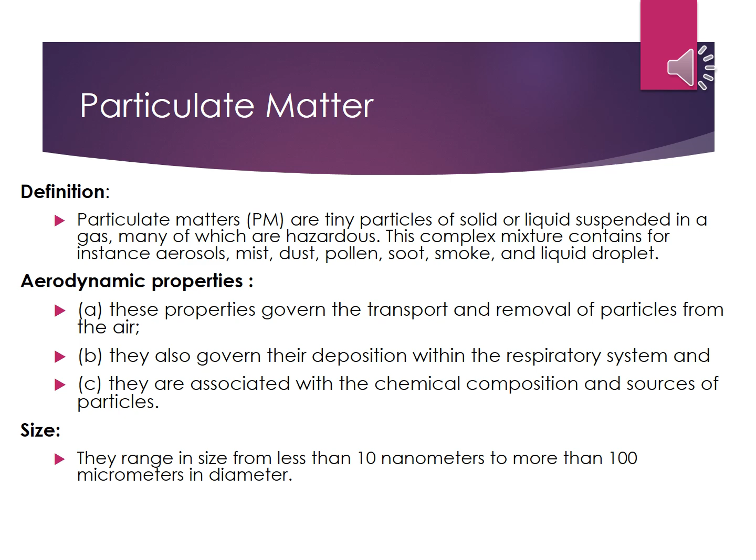Coming towards the sources of particulate matter. The sources are divided into two major types, the primary and the secondary sources. Primary sources are derived from both human and natural activities. Natural sources of particulate matter include sea salt, dust such as airborne soil, and pollen, but it also includes material from volcanic eruptions and particles formed from natural gaseous precursors, for example sulfates.

A significant portion of particulate matter is generated from a variety of human activities. These types of activities include agricultural operations, industrial processes, combustion of wood and fossil fuels, construction and demolition activities, and entrainment of road dust into the air.

Secondary particulate matter sources emit air contaminants into the atmosphere and form or help form particulate matter. Hence, these pollutants are considered precursors to particulate matter formation. These secondary pollutants include SOx, NOx, VOCs, and ammonia. Control measures that reduce particulate matter precursor emissions tend to have a beneficial impact on ambient particulate matter levels.

Some important industrial sources of particulate matter emissions are iron and steel mills, the blast furnaces, steelmaking furnaces, petroleum refineries, the catalyst regenerators, air-blown asphalt, and sludge burners, cement industry, asphalt batching plants, production of sulfuric acid, production of phosphoric acid, soap and synthetic detergent manufacturing, glass and glass fiber industry, and instant coffee plants. There are many more examples.

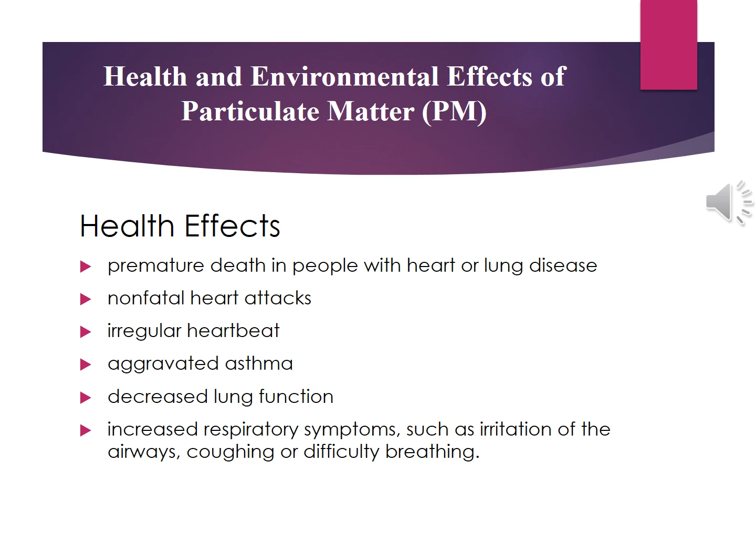Coming towards some of the environmental effects. Fine particles like PM2.5 are the main cause of reduced visibility, which we often call haze. Particles can be carried over long distances by wind and then settle on ground or water.

Depending on their chemical composition, the effects of this settling may include making lakes and streams acidic, changing the nutrient balance in coastal waters and large river basins, depleting the nutrients in soil, damaging sensitive forests and farm crops, affecting the diversity of ecosystems, and contributing to acid rain effects. Particulate matter can stain and damage stone and other materials, including culturally important objects such as statues and monuments. Some of these effects are related to acid rain effects on materials.

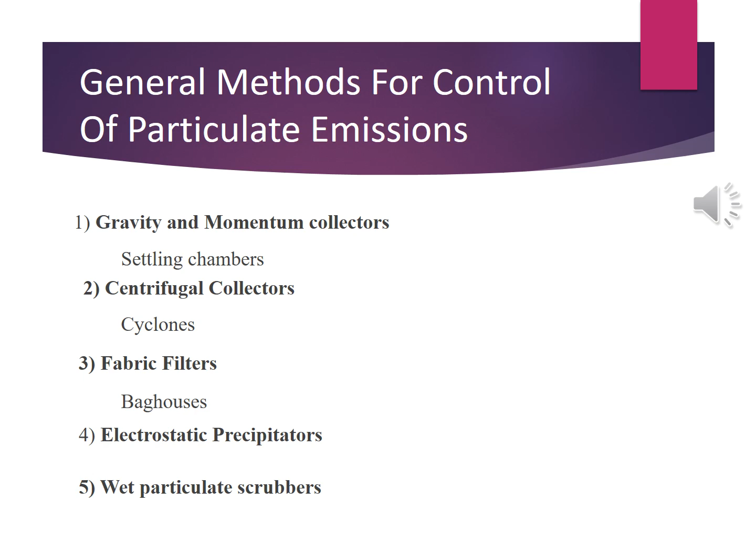Now let's talk about some general methods and technologies for the control of particulate matter emission. There are 5 types which are worth mentioning here. Number 1, gravity and momentum collectors. Number 2, centrifugal collectors. Number 3, fabric filters. Number 4, electrostatic precipitators. And number 5, wet particulate scrubbers.

Let's first talk about gravity settling chambers. This is a simple particulate collection device using the principle of gravity to settle the particulate matter in a gas stream passing through its long chamber. The primary requirement of such a device would be a chamber in which the carrier gas velocity is reduced so as to allow the particulate matter to settle out of the moving gas stream under the action of gravity. This particulate matter is then collected at the bottom of the chamber. The chamber is cleaned manually to dispose the waste.

The gas velocities in the settling chamber must be sufficiently low for the particles to settle due to gravitational force. Literature indicates that gas velocity less than about 3 meters per second is needed to prevent re-entrainment of the settled particles. The gas velocity of less than 0.3 meters per second will produce good results. Curtains, rods, baffles, and wire mesh screens may be suspended in the chamber to minimize turbulence and to ensure uniform flow. The pressure drop through the chamber is usually low and is due to the entrance and exit losses.

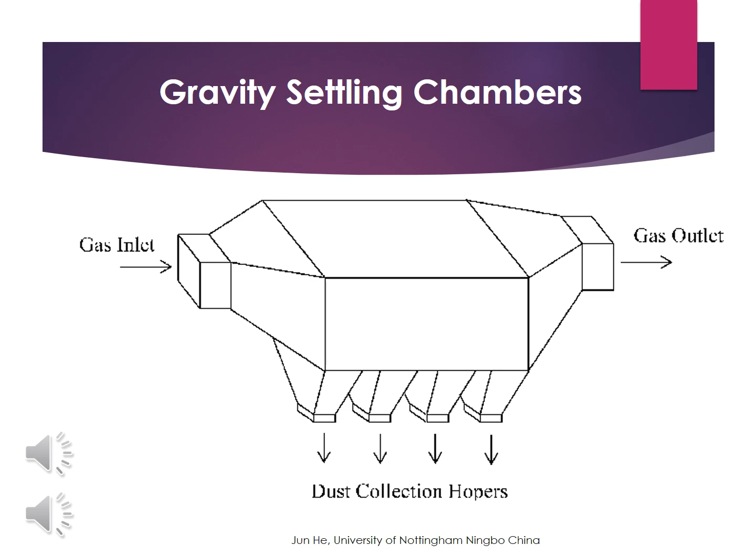Some advantages of gravity settling chambers: low initial cost, simple construction, low maintenance cost, low pressure drop, dry and continuous disposal of solid particles, use of any material for construction, and temperature and pressure limitations will only depend on the nature of the construction material.

Some disadvantages of the gravity settling chambers would be large space requirements, and only comparatively large particles greater than 10 micron can be collected. Because of the above mentioned advantages and disadvantages, settling chambers are mostly used as pre-cleaners. Use of settling chambers as pre-cleaners can also reduce the maintenance cost of high efficiency control equipment, which is more subject to abrasive deterioration.

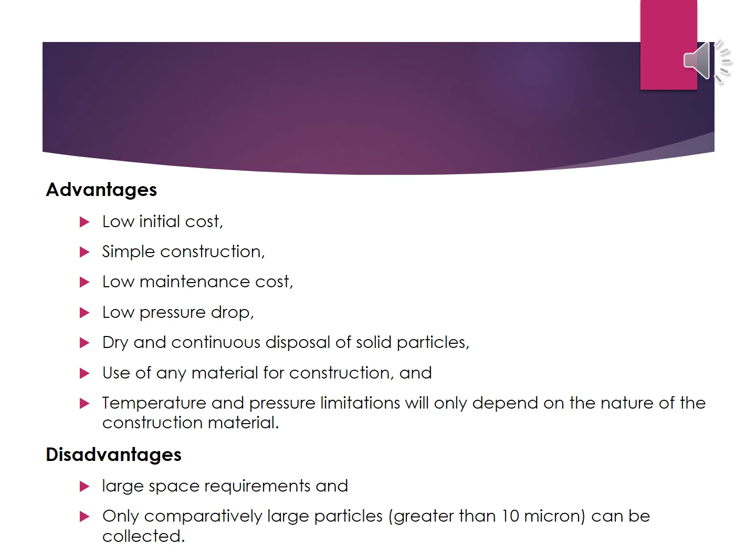Now let's talk about cyclone. Cyclone is an example of centrifugal collectors. Cyclone separators, or simply cyclones, are separation devices that use centrifugal forces for removing the fine particles. They are also known as centrifugal or inertial separators. They prevent more fine filtration methods from having to deal with large, more abrasive particles later on.

Also, several cyclone separators can operate in a parallel series, and when such an arrangement is set up, then the system is known as multiple cyclone. It is important to note that cyclones can vary drastically in their size. The size of the cyclone depends largely on how much flue gas must be filtered, and thus larger operations tend to need larger cyclones.

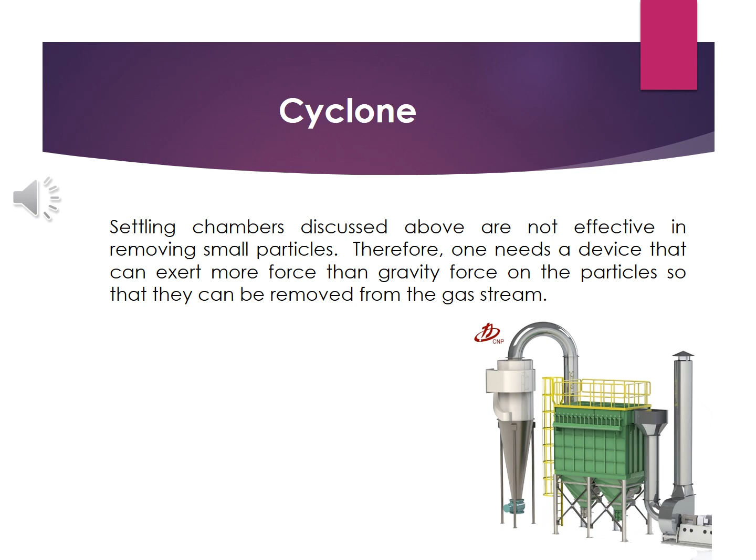Cyclone separators work much like a centrifuge, but with a continuous feed of dirty air. In a cyclone separator, dirty flue gas is fed into a chamber. Inside this chamber exists a spiral vortex similar to a tornado. The lighter components of this gas have less inertia, so it is easier for them to be influenced by the vortex and travel up it. Unlike these particles, larger components of particulate matter have more inertia and are not as easily influenced by the vortex.

Because these large particles have difficulty following the high-speed spiral motion of the gas and the vortex, the particles hit the inside walls of the container and drop down into a collection hopper. These chambers are shaped like an upside-down cone to promote the collection of these particles at the bottom of the container. The cleaned flue gas escapes out the top of the chamber.

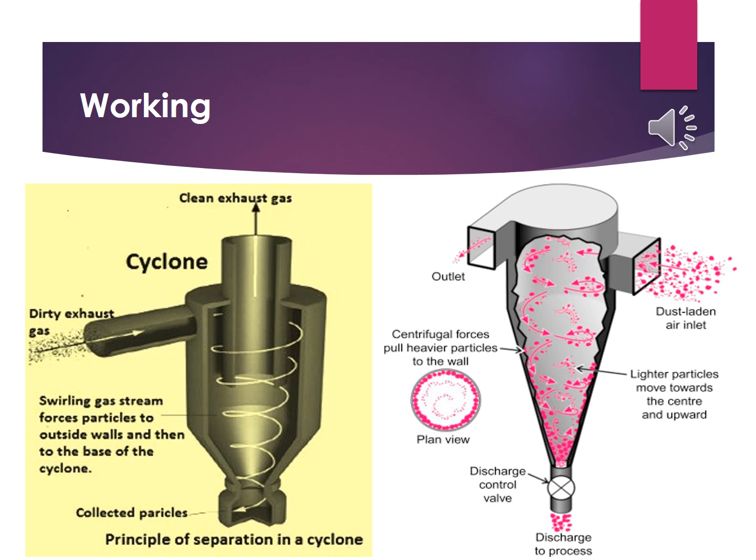The advantages of cyclone are low initial cost, simple in construction and operation, low pressure drop, low maintenance requirements, continuous disposal of solid particulate matter, and use of any material in their construction that can withstand the temperature and pressure requirements.

The disadvantages of cyclones include low collection efficiency for particles below 5 to 10 micron in diameter. Severe abrasion problems can occur during the striking of particles on the walls of the cyclone. And lastly, a decrease in efficiency at low particulate concentration.

Typical applications of cyclones are for the control of gas-borne particulate matter in industrial operations such as cement manufacture, food and beverages, mineral processing, and textile industries. To separate dust in the disintegration operations such as rock crushing, ore handling, and sand conditioning in industries. To recover catalyst dust in the petroleum industry. And lastly, to reduce the fly ash emissions.

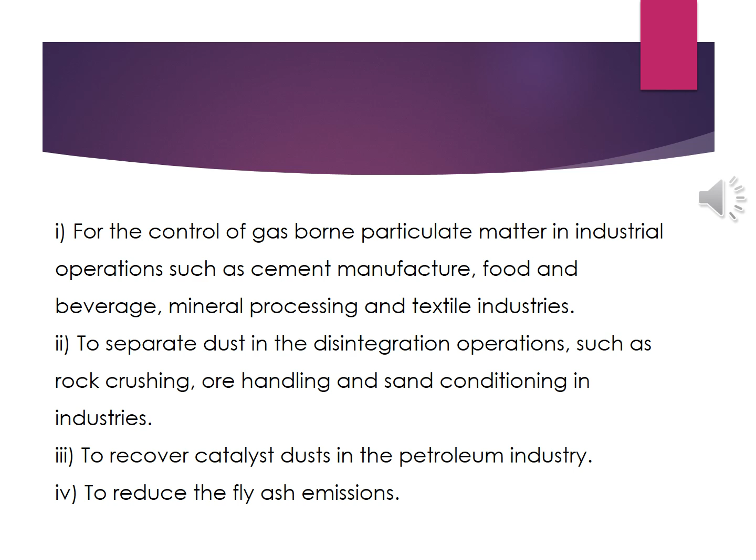The operating problems are number 1, erosion. Heavy, hard, sharp-edged particles in a high concentration, moving at a high velocity in the cyclone, continuously scrape against the wall and can erode the metallic surface. Number 2 is corrosion. If the cyclone is operating below the condensation point and if reactive gases are present in the gas stream, then corrosion problems can occur. Thus, the temperature should be kept above the dew point or a stainless steel alloy should be used.

Number 3, build-up. A dust cake builds up on the cyclone walls, especially around the vortex finder and at the ends of internal vanes, and especially if the dust is hygroscopic, it can be a severe problem.